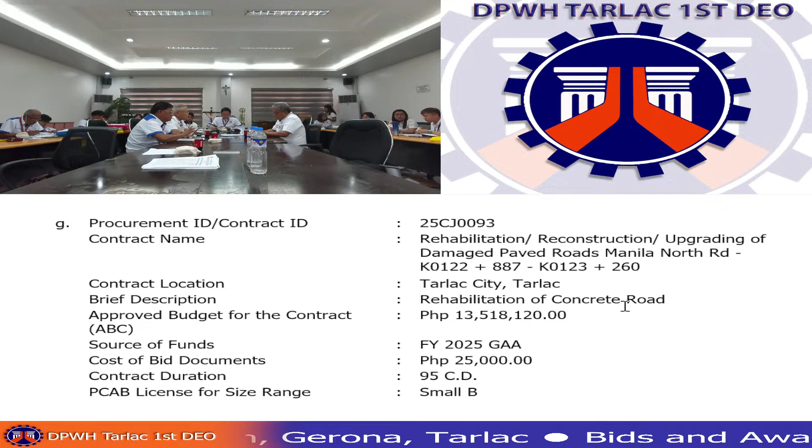Next, 25CJ0093, rehabilitation, reconstruction, upgrading of damaged paved roads, Manila North Road, K0122 plus 887, K0123 plus 260, Tarlac City. Its ABC is 13,518,120.

Next, 25CJ0094, construction of multipurpose building, Health Center, Barangay Matapitap, Gerona, Tarlac. Its ABC is 4,950,000. Next, last, 25CJ0095, construction of flood control structure along Tarlac River, O'Donnell River Control, Balanti, Armenia section, segment 27, Tarlac City. Its ABC is 96,500,000.

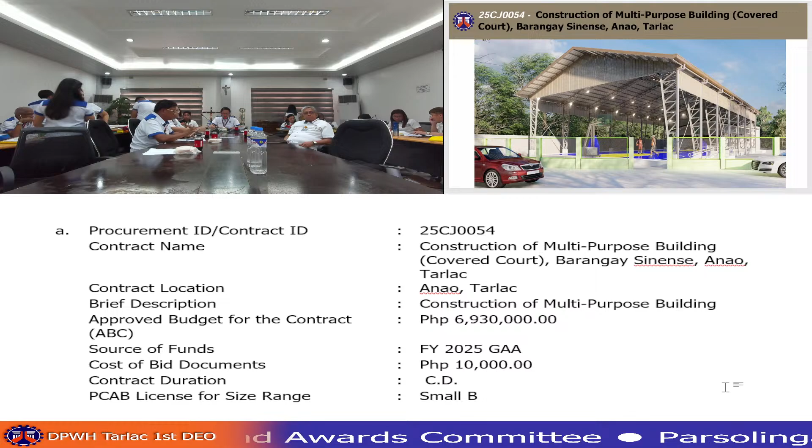Any questions from the comment box? Okay, so thank you, Engineer Angelica. Next project, 25CJ0055. May we call on Engineer Elmo Bernardo?

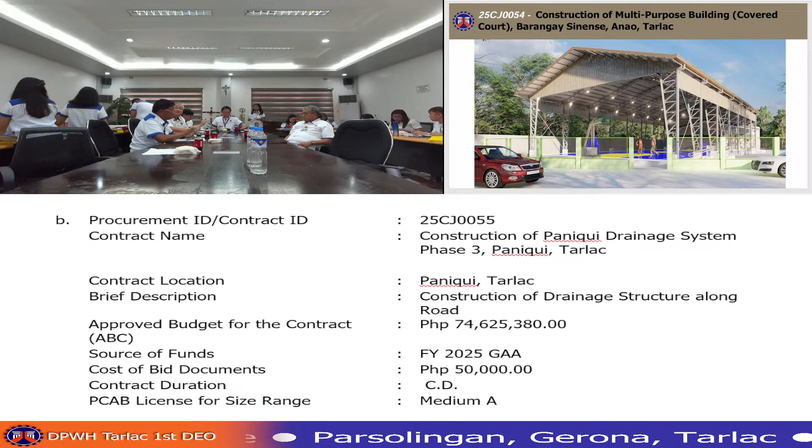Good morning. For 25CJ0055, construction of Paniqui drainage system, phase 3, Paniqui, Tarlac. Location, Paniqui, Tarlac. The scope of work is 316 linear meter target along Paniqui Poblacion Road. Rehabilitation of concrete line canal with paver blocks, curb and gutter at right side with an average height of 1.7 meter and 0.2 thick concrete sidewalk with paver blocks left side.

Construction of structured wall pipe, high density polyethylene pipe with a diameter of 2.1 meter along carriageway and a diameter of 1.0 as cross drain at every 50 meters. Rehabilitation of 4-lane pavement with a total width of 14.6 and a thickness of 0.38 meters. Application of reflectorized thermoplastic pavement markings, white, and a duration of 232 calendar days.

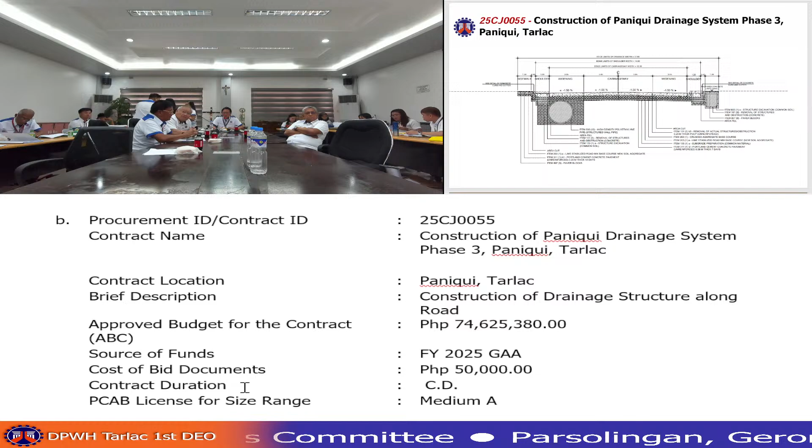Any questions? Okay, so thank you, Engineer Elmo. Next project, 25CJ0056. May we call on Jasper Ryan Silvestre? For contract ID number 25CJ0056 with a contract title of construction of road Barangay Mabini to Barangay San Agustin, Gerona, Tarlac.

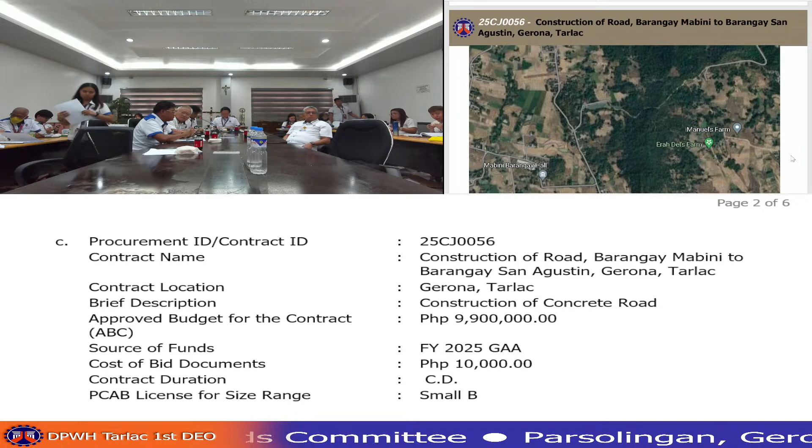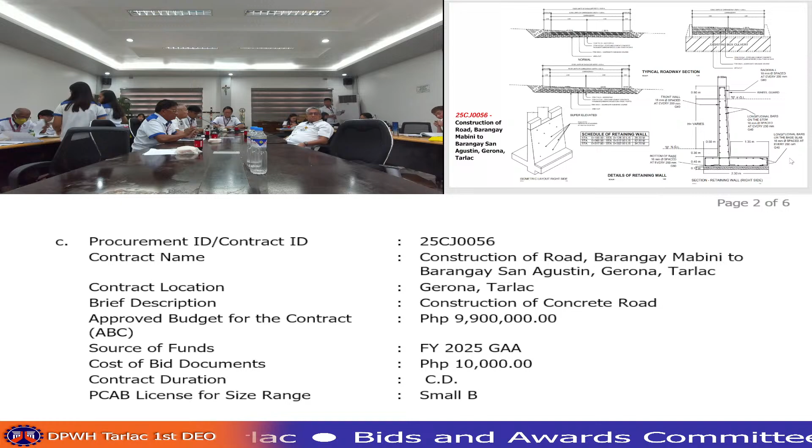The project is a construction of Barangay road at Barangay Mabini to Barangay San Agustin. The project has a net length of 352 linear meter or 0.704 lane kilometer. The project consists of the following items: clearing and grubbing, individual removal of trees, unsuitable excavation, structure excavation, embankment, subgrade preparation. The PCCP width is 5 meters and thickness of 0.28 meters, shoulder width of 0.5 meters, a subbase thickness of 0.20 meters throughout the project length.

The project also consists of constructing a retaining wall for the purpose of slope protection due to presence of bodies of water. The project has approved budget of 9,900,000 and has a total duration of 91 calendar days. Any questions? None. So thank you, Engineer Jasper.

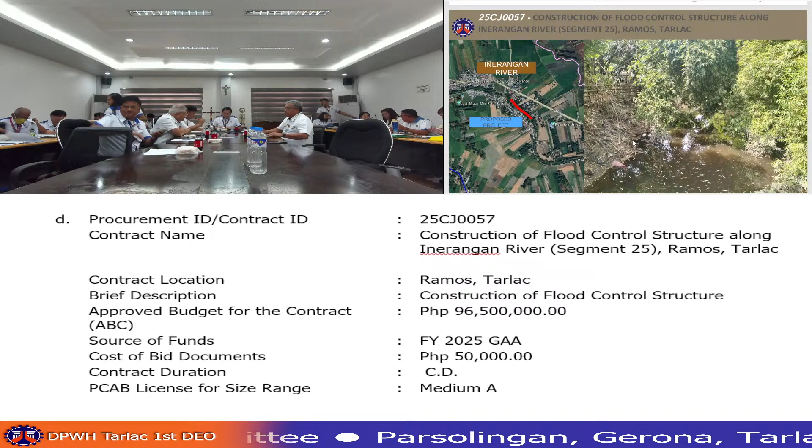Good morning everyone. I'm Zaldi Olivares of Planning and Design Section. This is introduced contract ID 25CJ0057.

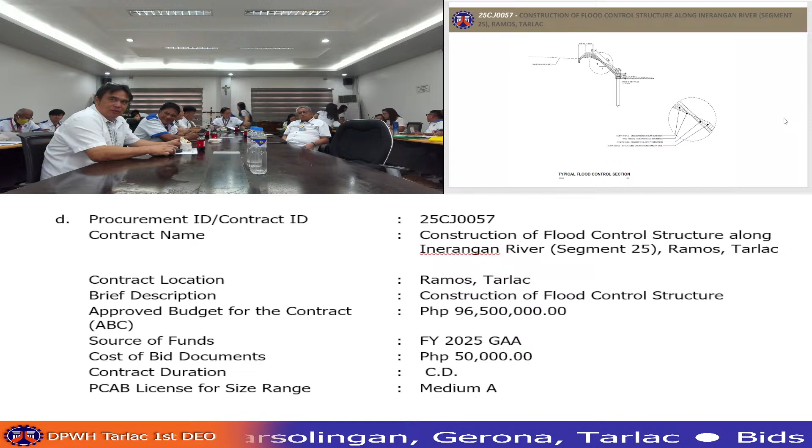Contract name: construction of flood control structure along Inerangan River, segment 25, Ramos, Tarlac. This project has a target length of 472 linear meters, project duration of 244 calendar days, and the approved budget for the contract of 96,500,000. The scope of works comprises earthworks, clearing and grubbing, excavation and embankment, banks and slope protection works. The length of steel sheet pile to be used after the concrete cover is chipped is 9 meters.

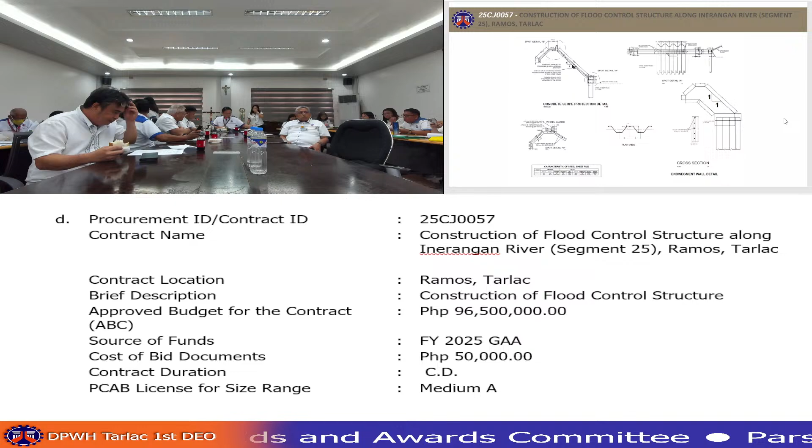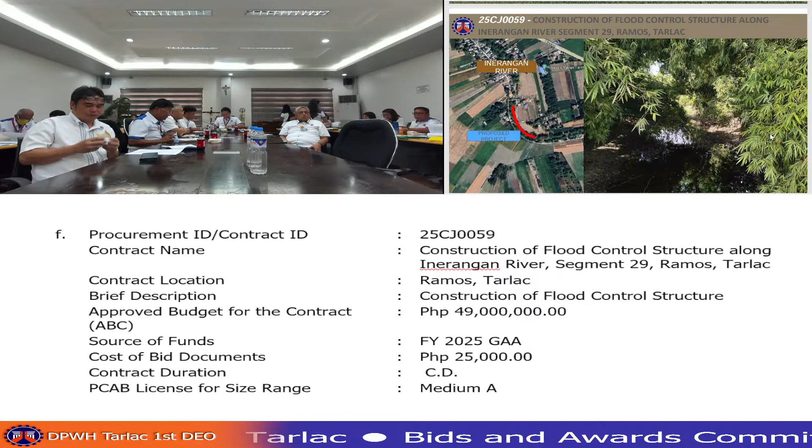Contract ID 25CJ0059, with the contract name of construction of flood control structure along Inerangan River, segment 29, Ramos, Tarlac. This project has a target length of 236 linear meters, project duration of 181 calendar days, the approved budget for the contract of 49,000,000. The scope of works comprises earthwork, clearing and grubbing, excavation and embankment, bank and slope protection works. The length of steel sheet pile to be used after the concrete cover is chipped is 9 meters.

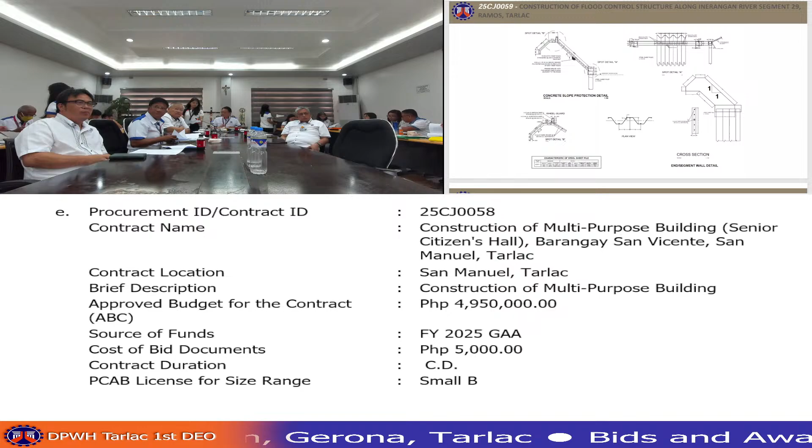Good morning everyone. I'm Engineer Lorraine Granil, presenting to you Contract ID 25CJ0058, Contract Name Construction of Multipurpose Building Senior Citizens Hall, Barangay San Vicente, San Manuel, Tarlac. Scope of works: complete construction of one-story Senior Citizens Hall from structural to architectural finishes with a dimension of 12 meters by 8 meters and no demolition.

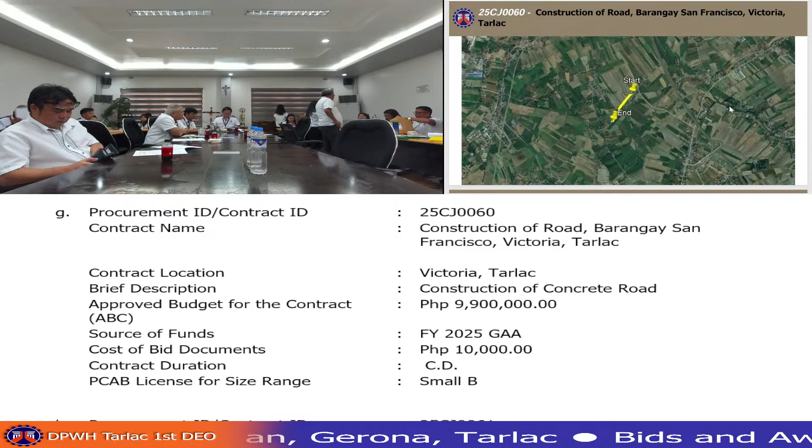Good morning everyone. For contract ID number 25CJ0060, with the contract title of Construction of Road, Barangay San Francisco, Victoria, Tarlac. It has a net length of 677 linear meters or 1.354 lane kilometers.

Scope of works include construction of concrete road with pavement width of 5 meters and a thickness of 0.28 meters, shoulder width of 0.5 meters. Other scope of works include clearing and grubbing, removal of trees, unsuitable excavation, embankment, subgrade preparation, and construction of 610 millimeters diameter reinforced concrete pipe culvert.

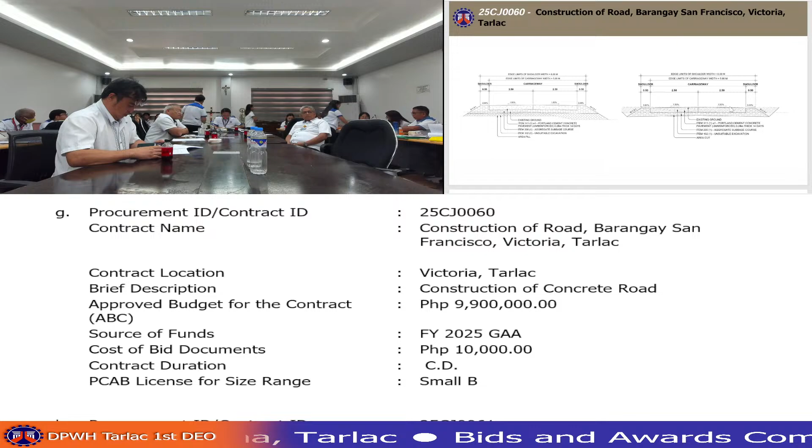Good morning everyone. For the contract ID 25CJ0061, construction of flood control structure along Susubaen Creek, segment 31, Ramos, Tarlac. This project has a net length of 410 linear meters with a total project duration of 244 calendar days, and approved budget for the contract amounting to 96,500,000.

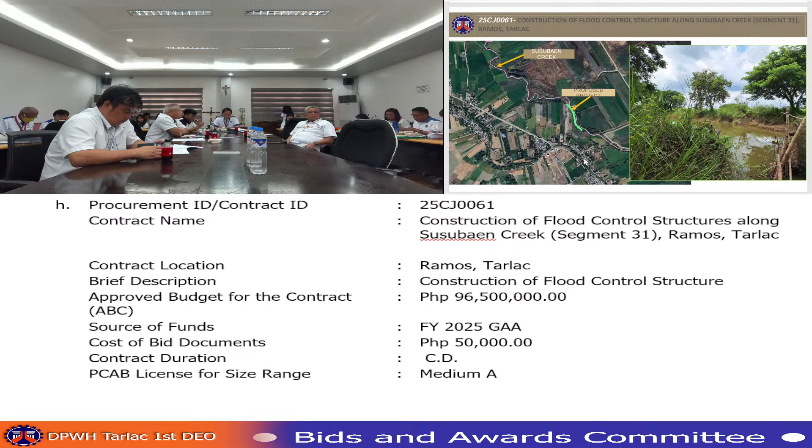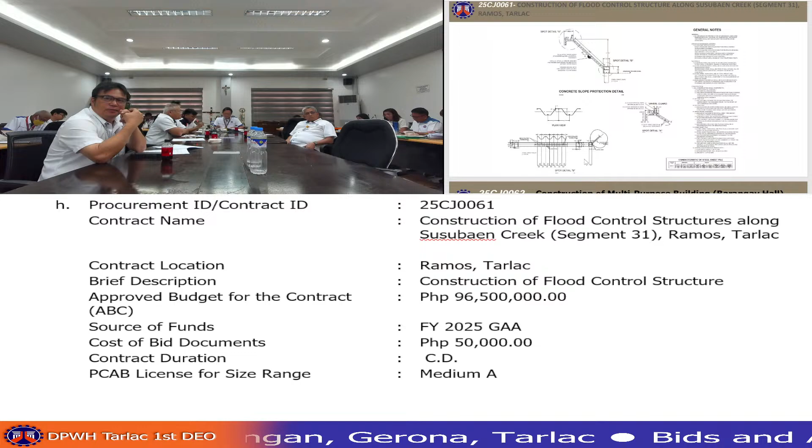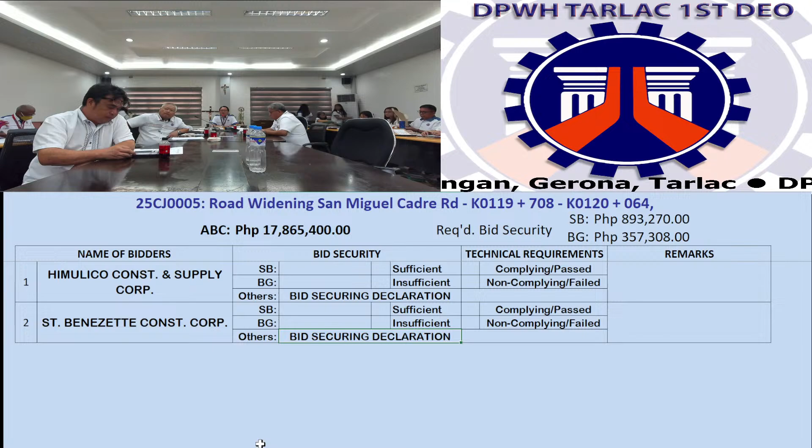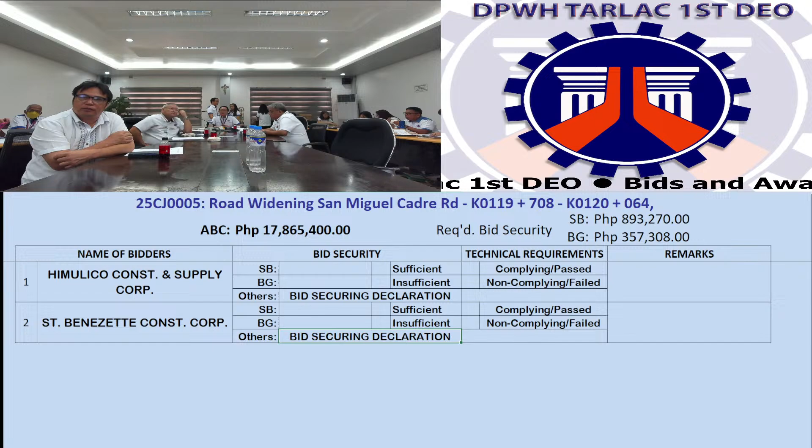Next, 25 CJ 0005, road widening San Miguel Cadre Road, K0119 plus 708, K0120 plus 064. We have 2 bidders. Its ABC is 17,865,400. Required bid security in the form of surety bond is 893,270. Bank guarantee is 357,308.

Next, 25 CJ 0006, construction of flood control structure along Baka River, segment 13, Paniqui, Tarlac. We have 3 bidders. Its ABC is 49,500,000. Required bid security in the form of surety bond is 2,475,000. Bank guarantee is 990,000.

Next, 25 CJ 0007, construction of multipurpose building, health center, Barangay Sapang, Maragul, Tarlac City. Its ABC is 4,950,000. Required bid security in the form of surety bond is 247,500. Bank guarantee is 99,000.

Next, 25 CJ 0008, preventive maintenance, Romulo Highway, K0126 plus 764, K0127 plus 459, K0127 plus 625, K0127 plus 711. Its ABC is 51,521,350. The required bid security in the form of surety bond is 2,576,067.5. And its bank guarantee is 1,030,427.

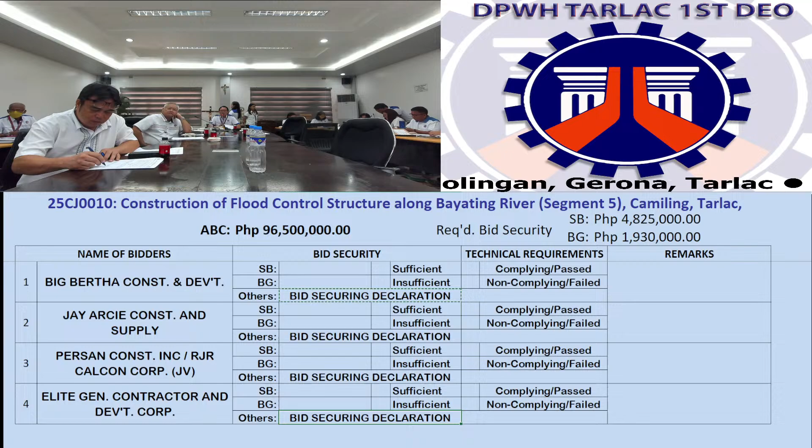Next, last 25 CJ 0010, construction of flood control structure along Bayating River, segment 5, Camiling, Tarlac. Its ABC is 96,500,000. The required bid security in the form of surety bond is 4,825,000. And its bank guarantee is 1,930,000.

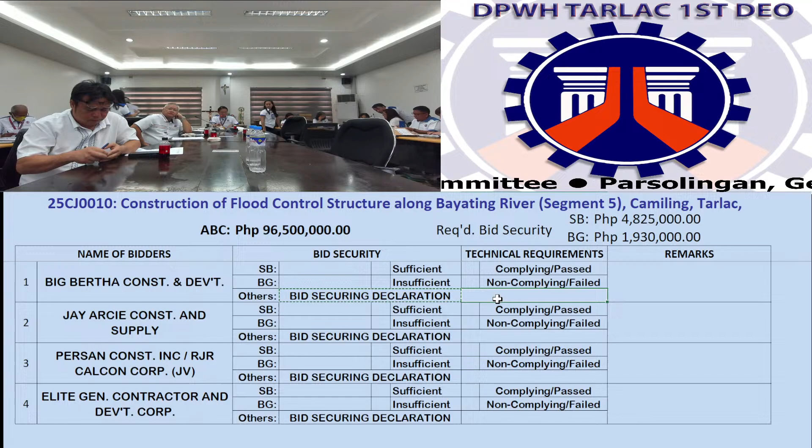We will waive the reading of the required bid security inasmuch as all the bidders have submitted bid securing declaration as their form of bid security, and these are accepted.

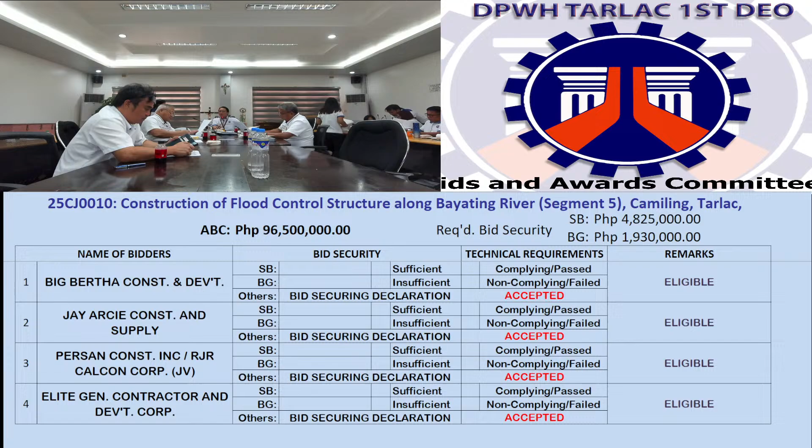We go now to the technical envelope for project number 1. Presence and absence of the required documents. The two bidders were found complying with their bids. You may now open the financial envelope.

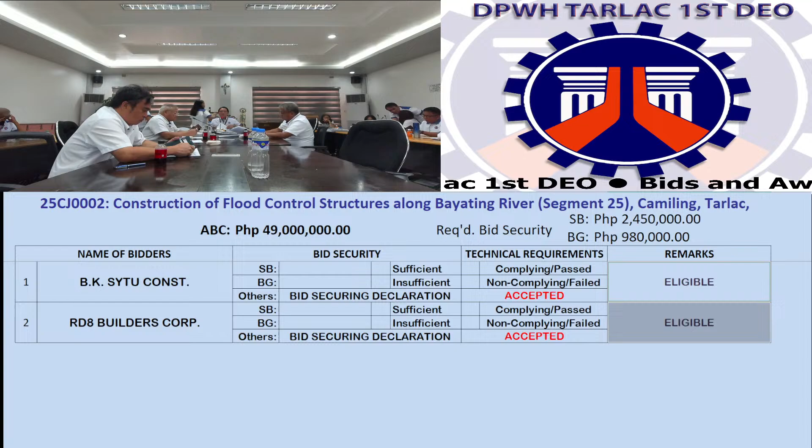For project number 2, presence and absence of the required documents, the two bidders were found complying. You may now open the financial envelope.

For project number 3, presence and absence of the required documents, the two bidders were found complying. You may now open the financial envelope.

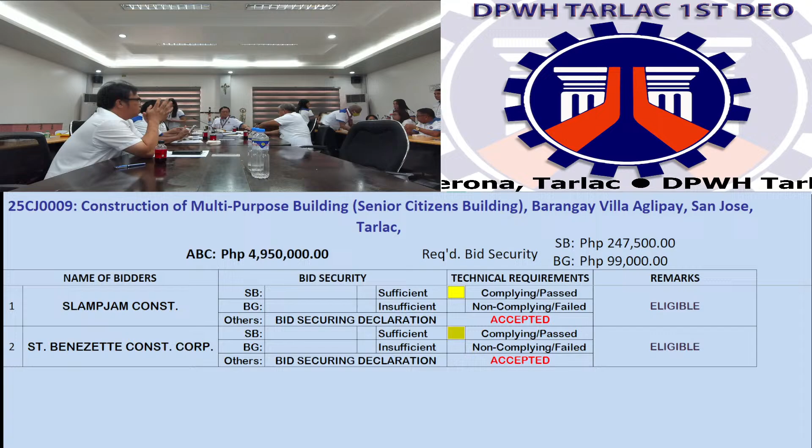For project number 9, presence and absence of the required documents, the two bidders were found complying. You may now open their financial envelope.

For project number 7, presence and absence of the required documents, the two bidders were found complying. You may now open their financial envelope.

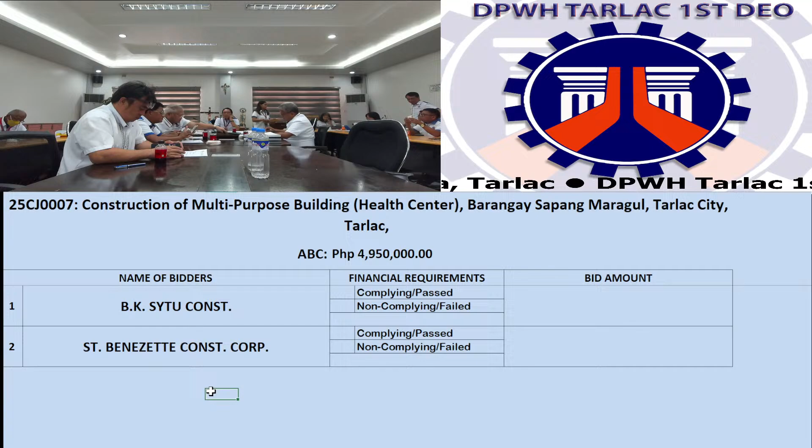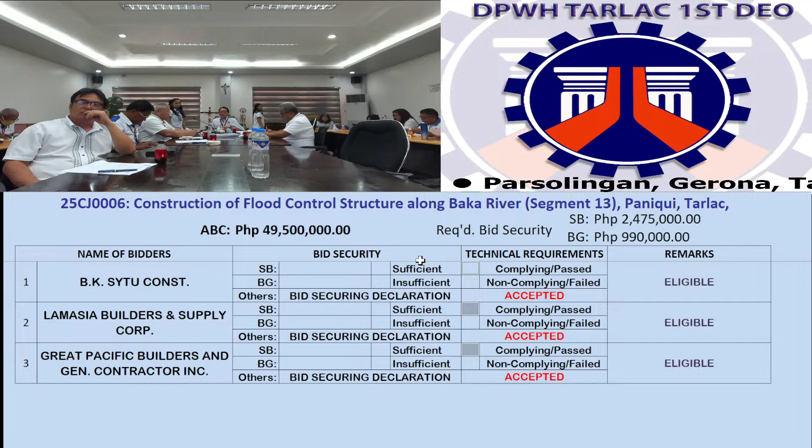For project number 6, presence and absence of the required documents, the 3 bidders were found complying. You may now open their financial envelope.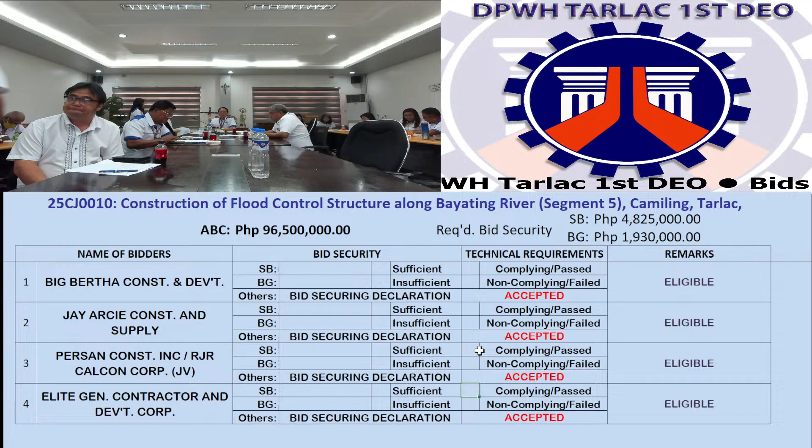For project number 10, presence and absence of the required documents, the 4 bidders were found complying. You may now open their financial envelope.

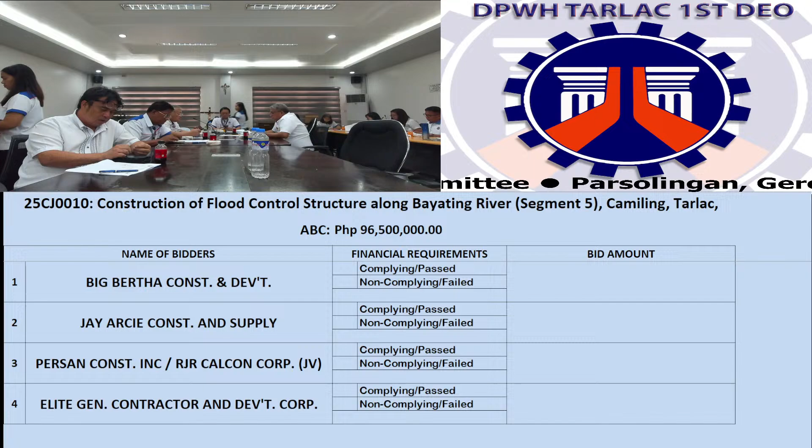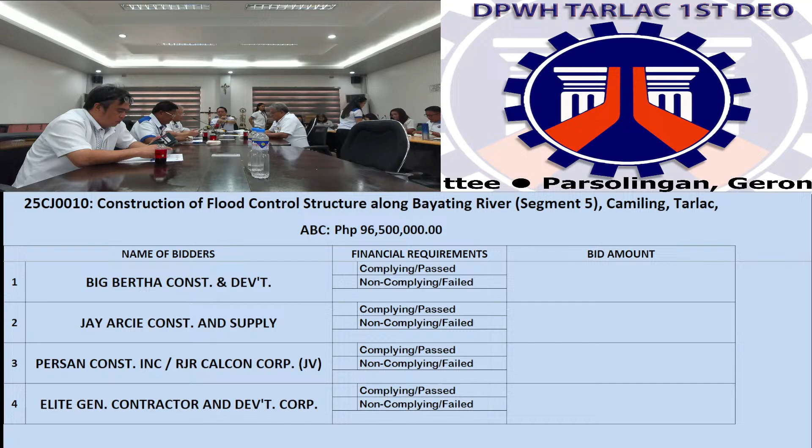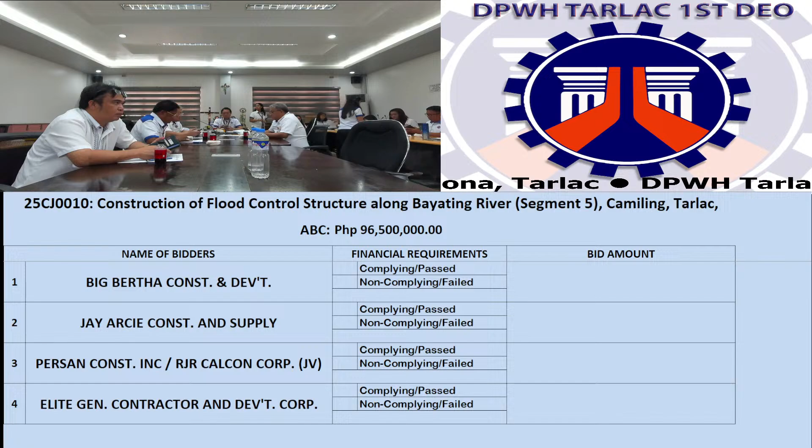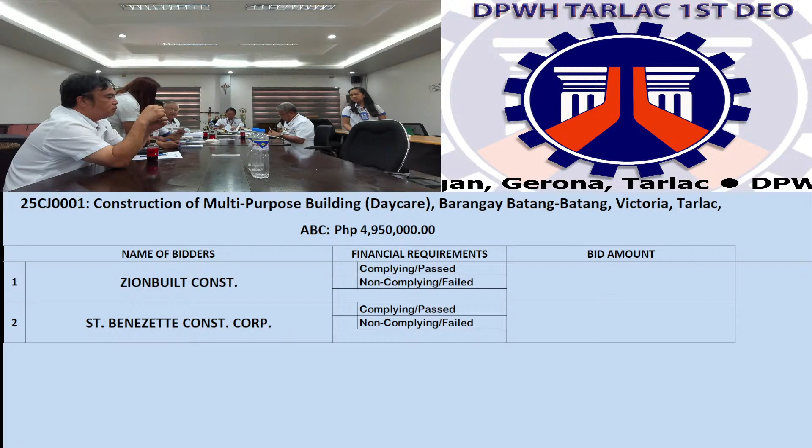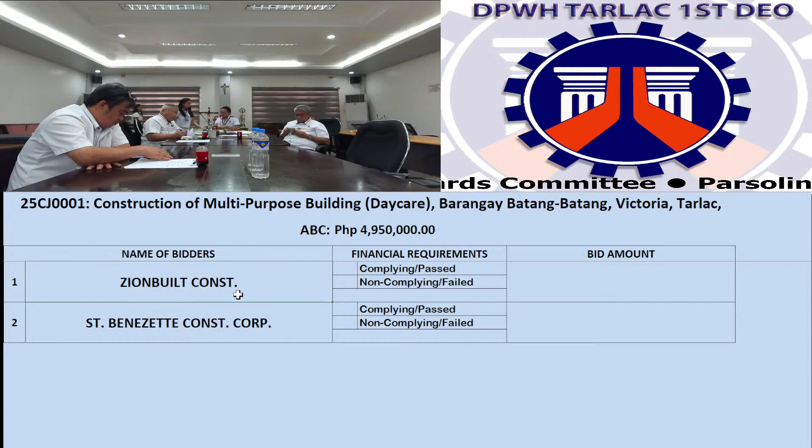Let us now go to the financial component for project number 1. Presence and absence of the required documents. The two bidders were found complying with their bid.

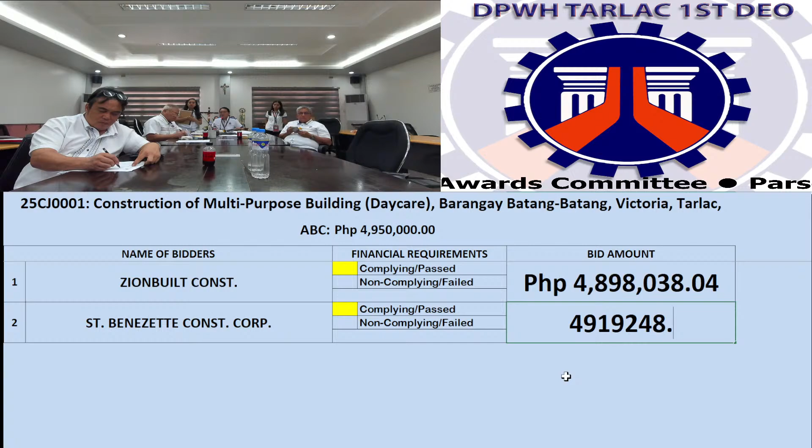For Zionbuilt, 4,898,038.04. For Saint Benezette Construction, its bid is 4,919,248.18. So all bids are below ABC.

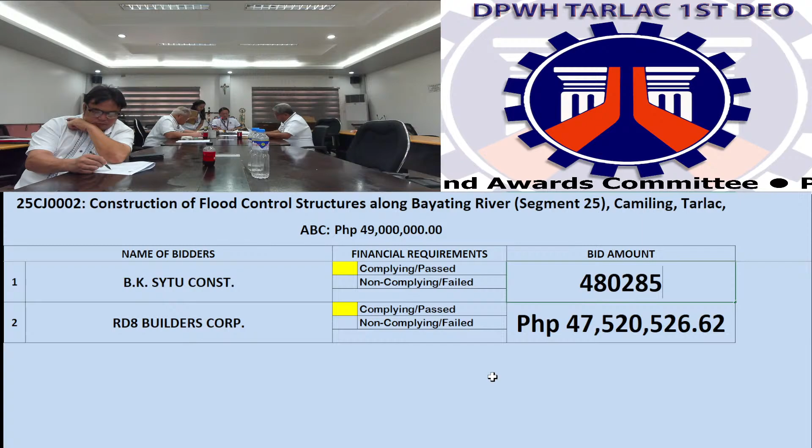For project number 2, presence and absence of the required documents. The two bidders were found complying with their bids. For RD8 Builders, 47,520,526.62. For B.K. Sytu Construction, its bid is 48,028,574.30. All bids are below ABC.

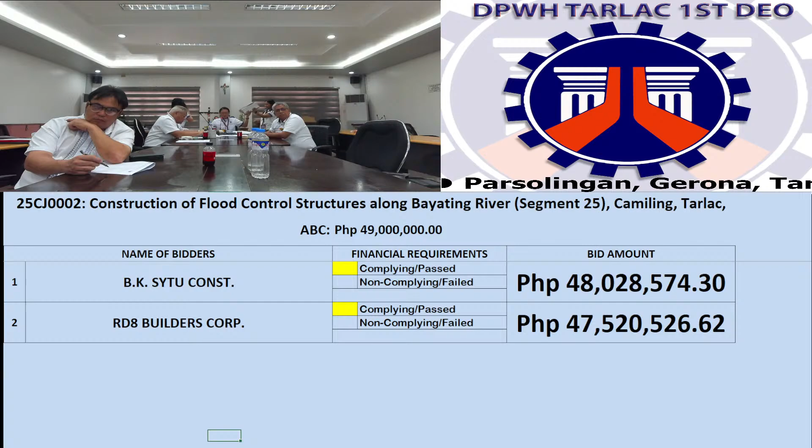For project number 3, presence and absence of the required documents, the two bidders were found complying with their bids. For Lamasia, 25,407,281.95. For AC Sullivan, we have 25,450,233.16. All bids are below ABC.

Project number 4, presence and absence of the required documents. The lone bidder is found complying with its bid. 3,819,855.85. Its bid is below ABC.

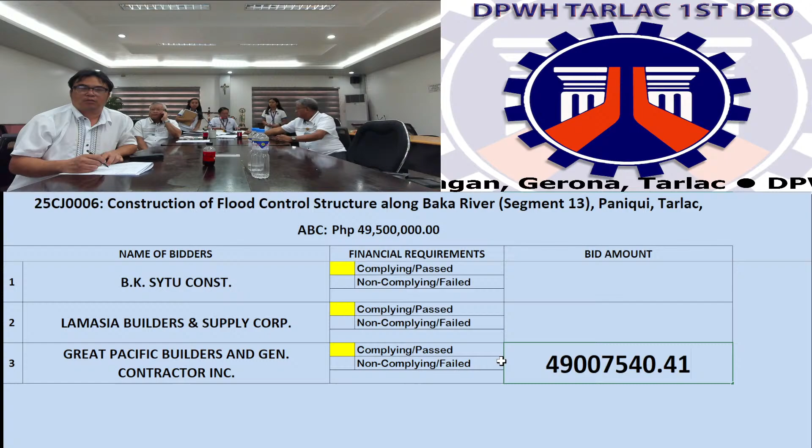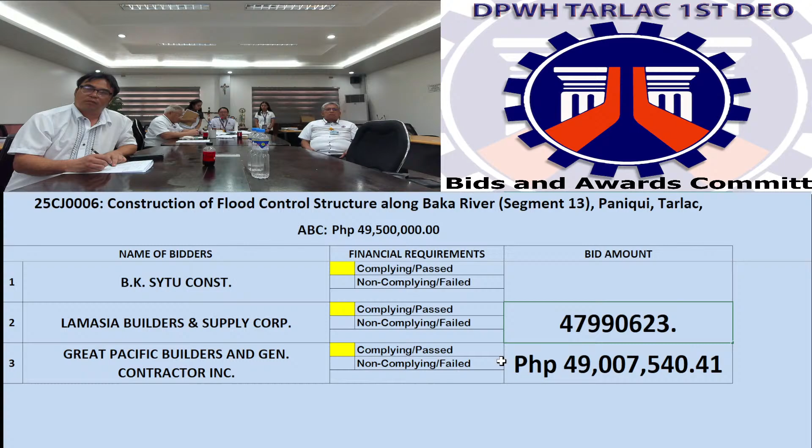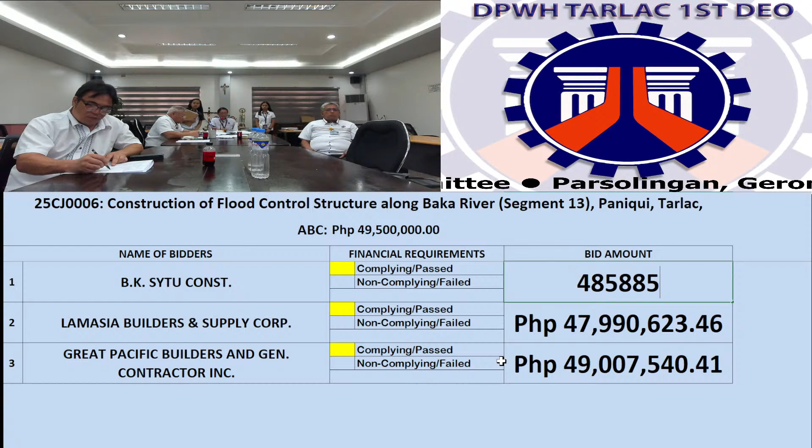Project number 6, presence and absence of the required documents. The three bidders were found complying with their bids. For Great Pacific Builders, we have 49,007,540.41. For Lamasia Builders, we have 47,990,623.46. B.K. Sytu, its bid is 48,588,578.79. All bids are below ABC.

Wala akong pera. Sige. Meron nga yun.

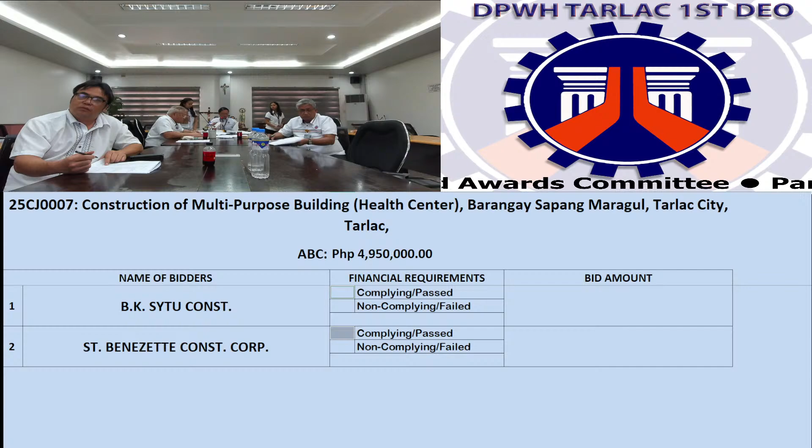Project number 7. Presence and absence of the required documents. The two bidders were found complying with their bids. For B.K. Sytu, 4,897,953.70. Saint Benezette Construction, its bid is 4,920,186.72.

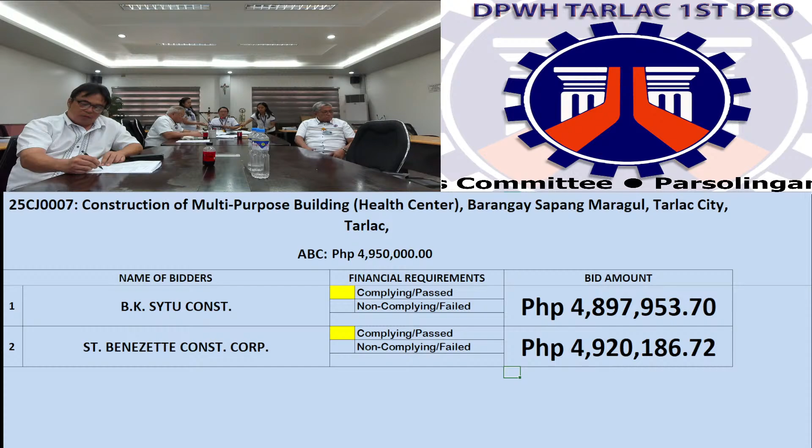Project number 8. Presence and absence of the required documents. The three bidders were found complying with their bids. For Royal Crown Monarch Construction, its bid is 50,234,116.97. Northern Builders, 50,322,485.58. For Big Bertha Construction, its bid is 50,340,327.45. All bids are below ABC.

For project number 9, we have 3 bidders. Presence and absence of the required documents. Two bidders were found complying with their bids. For Saint Benezette Construction, its bid is 4,949,949.68. For Slam Jam, its bid is 4,923,759.20. All bids are below ABC.

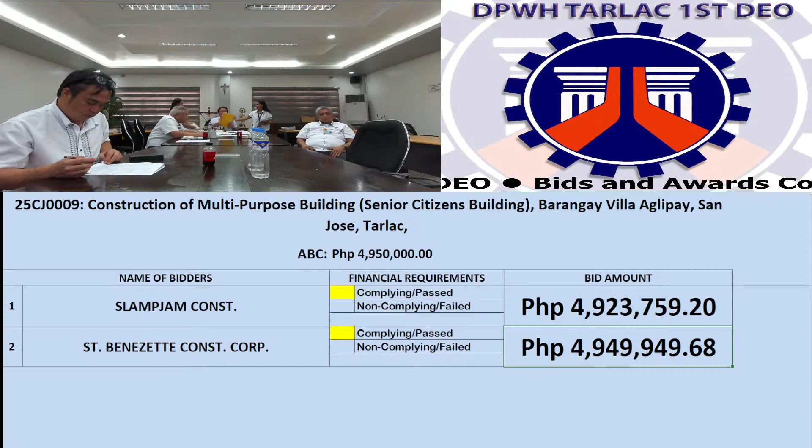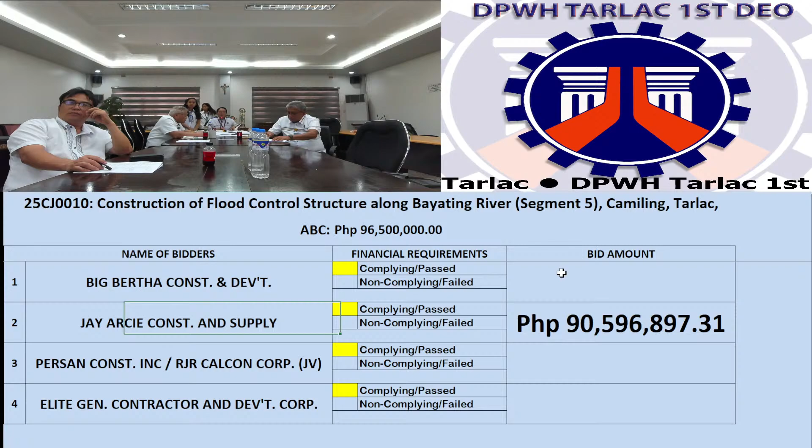So, for the last project, presence and absence of the required documents, the 4 bidders were found complying with their bids. For Jay Arcie Construction, its bid is 93,596,897.31. For Persan Construction, its bid is 93,585,787.35. Big Bertha Construction, its bid is 94,685,481.58. Elite General Contractor and Development Corporation, its bid is 95,535,780.47. All bids are below ABC.

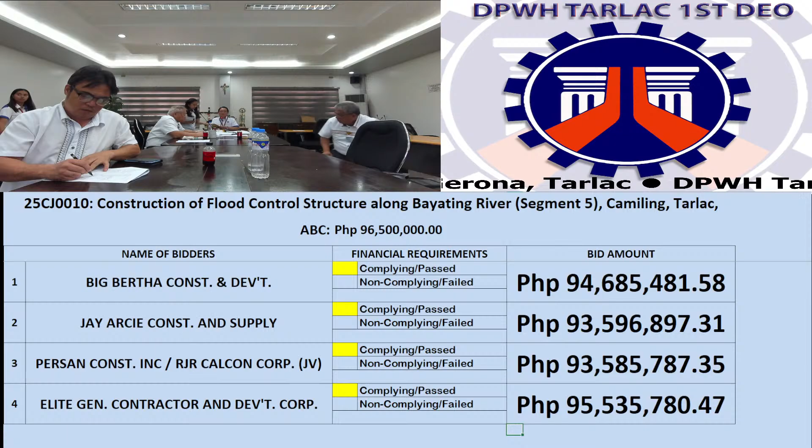That ends our opening of bids. Each project, starting from the lowest calculated bid, shall undergo post-qualification to determine its responsiveness to all the requirements and conditions as specified in the bidding documents. Any question, clarification? Hearing none, the meeting is adjourned. Thank you for coming.